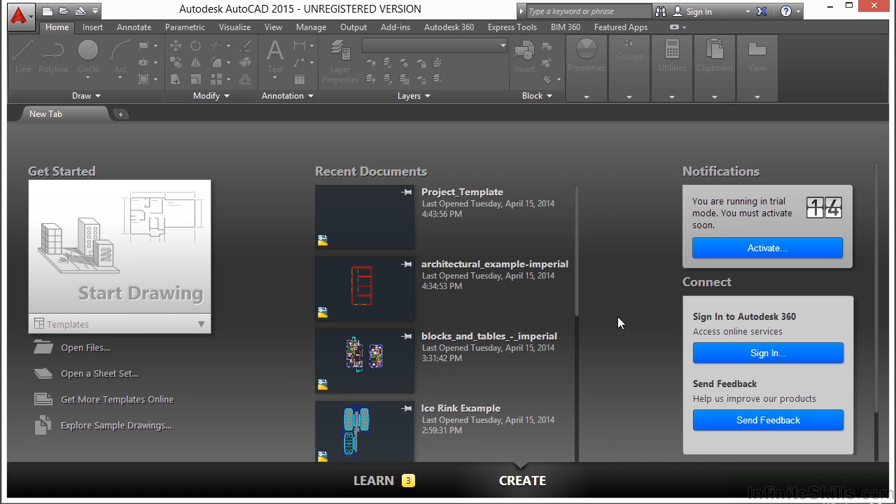Let's open up the dimension example drawing for this chapter. You can create dimensions for a variety of object types in many orientations. Linear dimensions can be horizontal, vertical, aligned, rotated, a baseline, or a continued or chained string of dimensions. Here we have several dimensions on this bracket.

Dimensions can also be associative, non-associative, or exploded. Associative dimensions adjust to changes in the geometric objects that we measure. I recommend that you always use associated dimensions, especially if you're placing your dimensions in paper space, as is the example here. Dimension associativity defines the relationship between your objects and their dimensions. Now, there are three types of associativity between geometric objects and dimensions.

Associative dimensions. These types of dimensions automatically adjust their locations and orientations and measurement values when the geometric object associated with them is modified. Now, dimensions in a layout may be associated to objects in model space. That's where the DIMASSOC system variable is set to 2. We'll go over this later on.

Non-associative dimensions. Non-associative dimensions do not change when the geometry changes that they're measuring. The dimension variable set for this is DIMASSOC set to 1. That's DIMASSOC when it's set to 1.

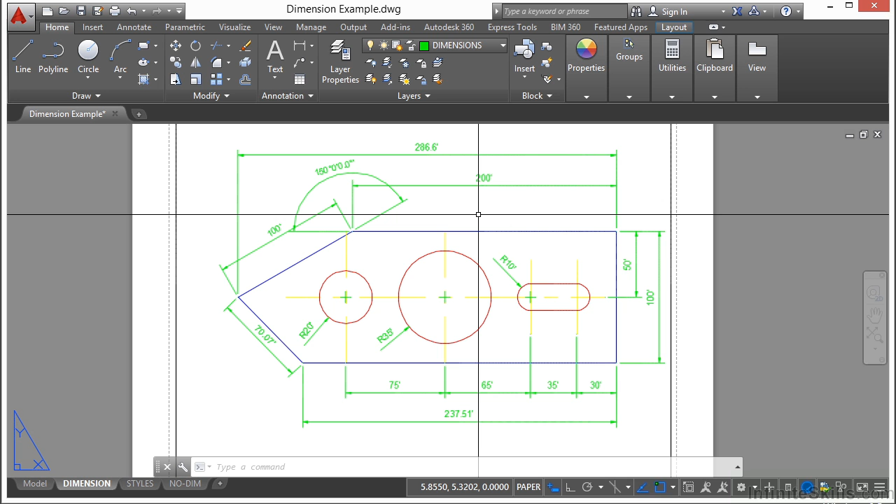Dimensions have several distinct elements. They have the text, they have dimension lines, that's the horizontal line here. They have arrowheads, which you can change to be many different shapes. They also have extension lines. Those are the vertical lines that you see here that come from the object they're dimensioning and extend up to the dimension line and arrowhead. All of these can be controlled, defined, and altered through a dim style or dimension style. And this can be done also through a properties manager.

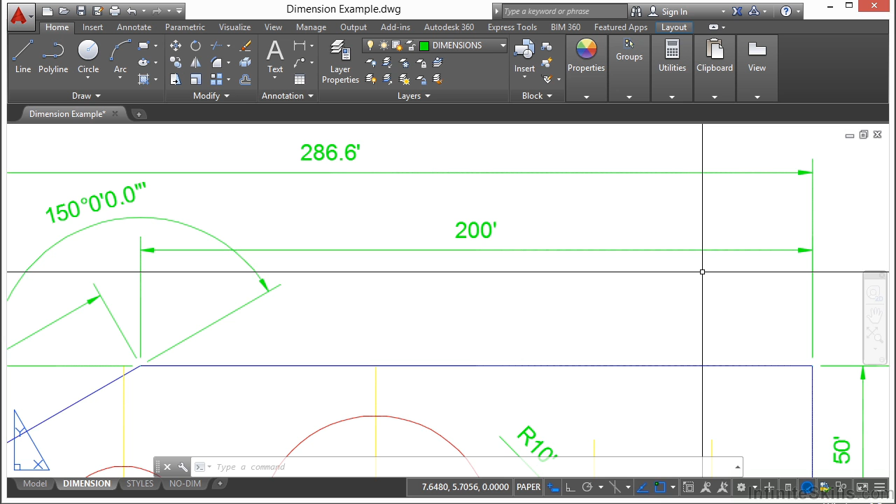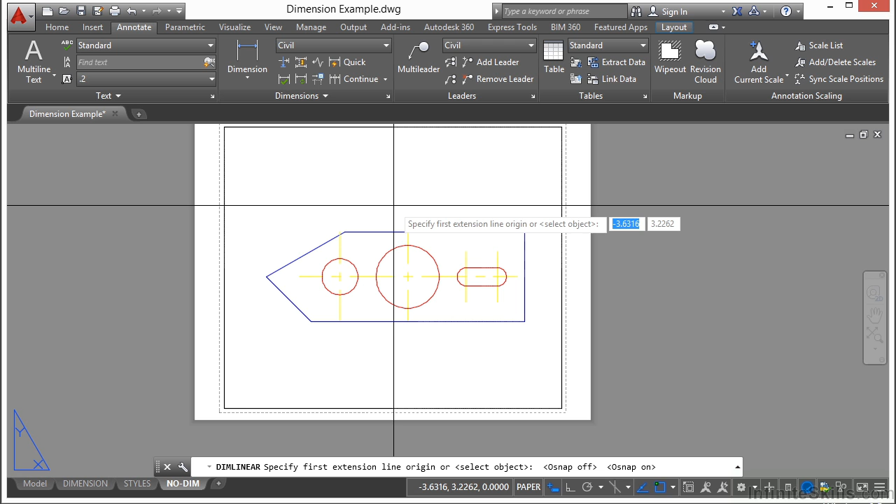Let's make some basic dimensions. Let's go to the No Dim Paper Space tab. Go to the Annotate tab on the ribbon. Go to the Dimensions panel. Click on the arrow here from Dimension and click on Linear. Make sure your Osnaps are turned on and that you have your endpoint Osnap running. When you're set up that way, you'll be able to create some dimensions very quickly.

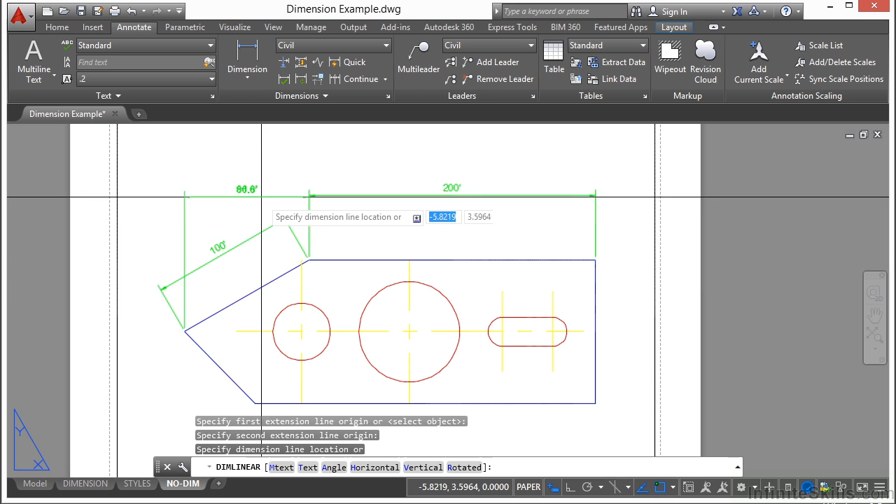I'll show you. I snap to here, and I have my dimension. If I select my aligned dimension, I can get dimensions at angles that give the true length value. If I go back to my linear dimension, this will create a dimension that is locked into horizontal or a vertical orientation. Those are your basic dimensions, the linear and the aligned.

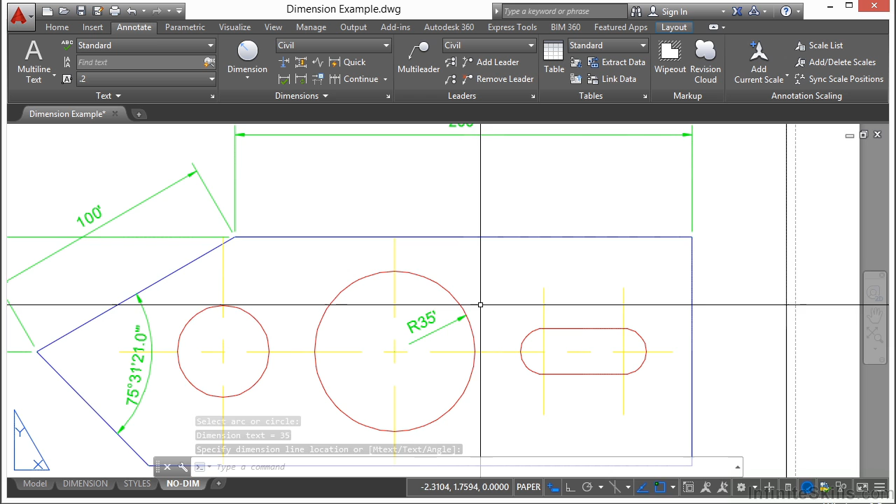Now, an angular dimension will display the angle between two lines or objects. Radial dimensions will give you the radius or diameter of a circle or arc. Just select the object of the circular nature and then pick where you want it to go. That is the very basic use and application of dimensions. We're going to get into each part of it a little bit more in detail.